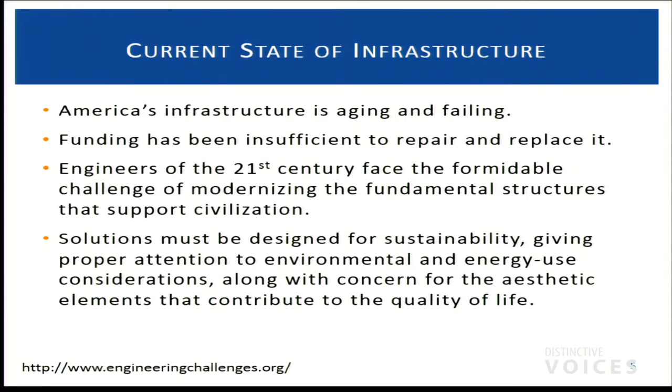The second challenge is that the amount we're investing in repairing and maintaining our infrastructure, as a percentage of total tax funding, has been going down. I think that's because our population is growing—we have a lot of other needs, for schools or hospitals, and so that funding has just been dispersed. So the challenge is for engineers moving forward to come up with better ways to design infrastructure systems, and also how to identify damage and maintain or repair it in a more sustainable manner. That's what I hope to talk to you about a little bit.

Just to give you some information, the American Society of Civil Engineers also has a report card for each state, so you can look at California's report card. They don't have bridges explicitly here—it's tied into the transportation system. So let's start off with bridges.

Bridge is classified as anything that's over 20 feet long, so some of these are really pretty short structures, but there are more than 600,000 highway bridges in the United States. This plot shows the number of bridges as a function of age, and what you see is that about half these bridges are 40 years old or older.

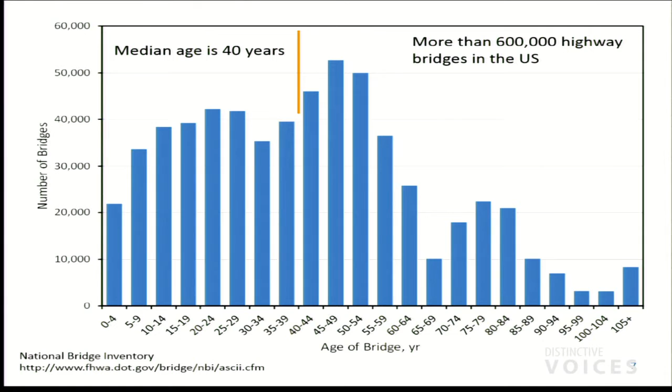Now think about the other types of engineered systems you use all the time. Your automobile, I guarantee, is going to be younger than 40 years. Your cell phone, your computer, they weren't even available 40 years ago. So there's a fundamental disconnect between the types of structures that are part of this urban infrastructure and what we accept as other systems available today. The design principles are very different.

As I mentioned, society has grown. 100 years ago, I don't think anyone would have guessed what Southern California would look like today. That factors into why some of this aging, or some of the deterioration, has occurred.

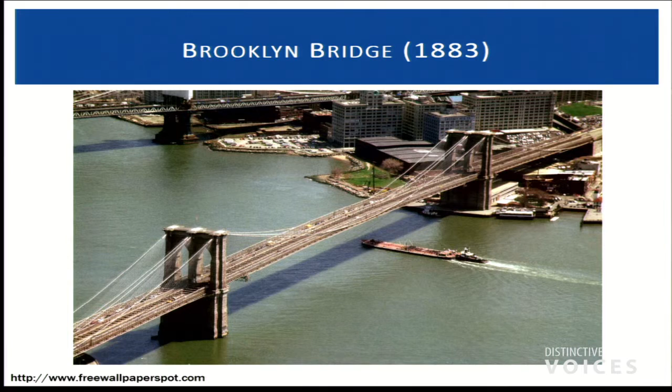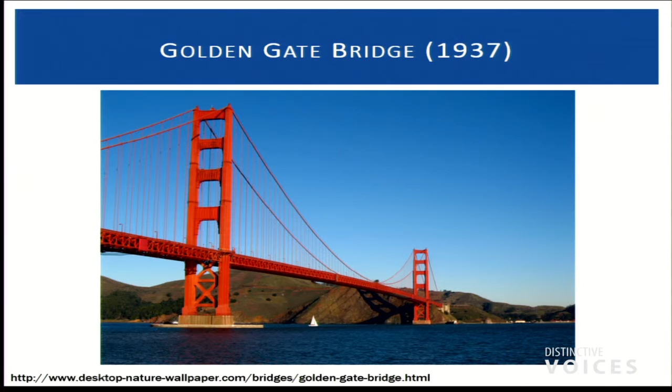As I mentioned, there are some really old bridges that are icons we have great national pride in, like the Brooklyn Bridge on the East Coast and the Golden Gate Bridge here in California. I think all Americans recognize these structures, and maybe I'm going a bit overboard to say there's a sense of pride, but if something were to happen, I think it would be recognized as a loss.

If you look at a map across the entire U.S., these are bridges that aren't unsafe, but they are having deterioration. If there's enough deterioration, they get classified as structurally deficient. You see a lot of these bridges concentrated on the East Coast, because that's where some of our older cities are, but there are also a decent number here in California.

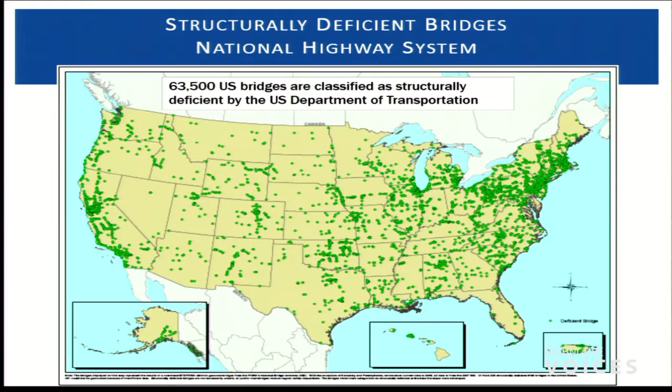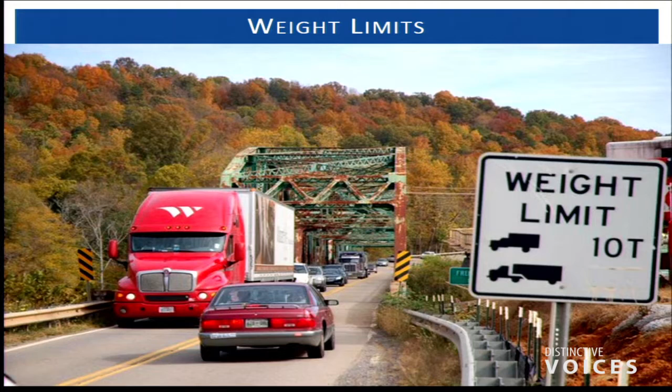In order to ensure the safety of these structures, you've probably seen the load limit signs, which limit the size of vehicles that can cross these bridges. So I don't want you to feel as if there are a whole bunch of unsafe bridges out there. That certainly is not the case.

The bridges are inspected fairly regularly—I'll give you a slide about that in a few minutes. But there is deterioration. If you look at this bridge in the photograph, you can see the rust, right? So rust means we've lost some of the cross-section of the steel sections.

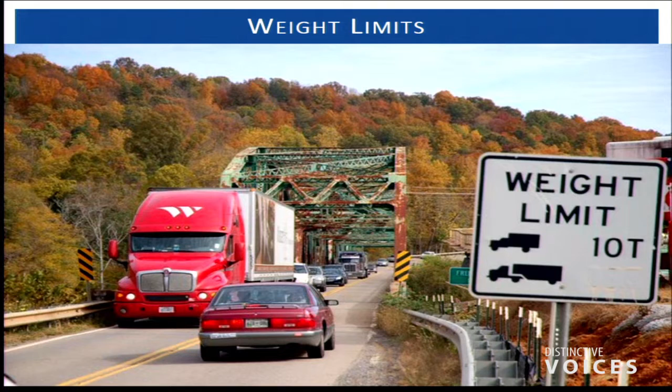You also notice this is a very narrow bridge. You probably don't want to be driving across this when there's a tractor trailer coming right at you. That's because some of these design standards have changed—trucks have gotten considerably larger and heavier in the past 40 to 60 years.

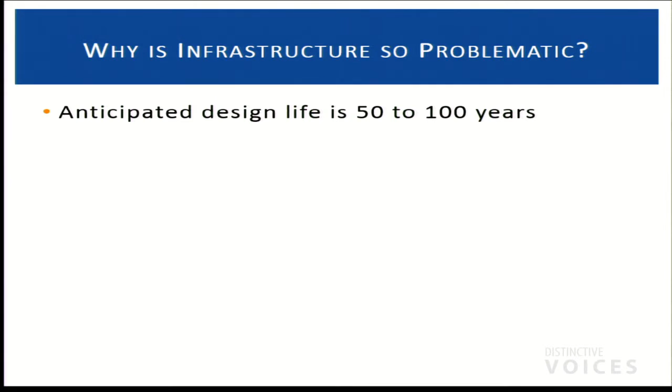I think the last picture really illustrates why infrastructure is problematic. The first thing is we design these systems to last somewhere between 50 and 100 years. But if you start thinking about what Southern California will look like 100 years from now, you realize how difficult that's going to be.

I don't think anyone in this time frame would anticipate how much the population has grown, or how heavy our trucks have become on the highways.

The next thing is that every single structure is unique. If I think of another big structure like an airplane, we have a couple models produced in a factory, but they're all the same design. That's not what happens with these infrastructure systems—everyone has unique conditions, and they're all done one of a kind, in place. So that's very different also.

Another thing that's incredibly important is that we're using public funds for construction, which means all of us are contributing to the construction of these facilities. We don't want the gold-plated bridge, right? We want to make sure we're getting our money's worth, so we have to focus on the initial cost. Unfortunately, what that sometimes tends to do, especially since we don't know what's going to happen in the future, is that the cost of maintenance can be high, and our budgets are tight. So we don't always have the money we need for maintenance and as much repair as we would like.

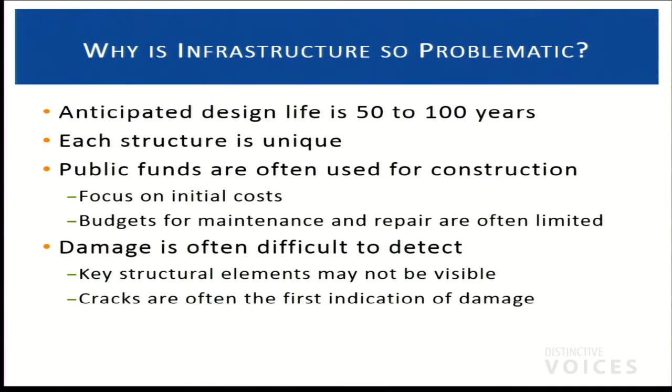And yet think about the Brooklyn Bridge or the Golden Gate Bridge. They're miles, or Golden Gate at least is miles long. So it's very hard to find something as small as a crack that's initiating in a structure that's that large. So that early detection of damage is quite difficult. Even if you identify the damage, it can often take many, many years before a structure can be replaced.

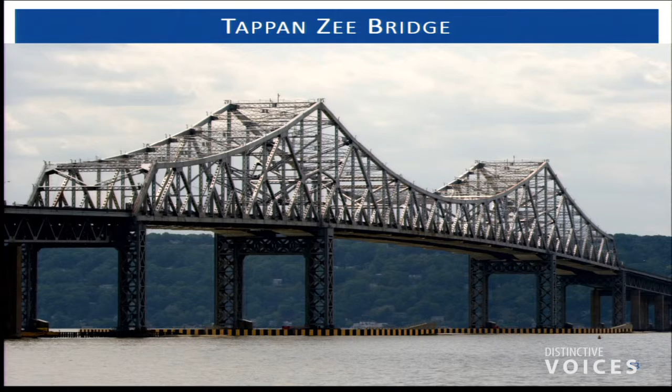So this is the Tappan Zee Bridge. It crosses the Hudson River just north of New York City. Okay, this bridge was opened in 1955. More than 140,000 vehicles cross it every day. And what happens here is there's so much traffic going across the river that they actually have to change the lanes so that there are 5 lanes going with the direction of the commuters and 2 lanes going in the opposite direction. So in the middle of the day, they switch that.

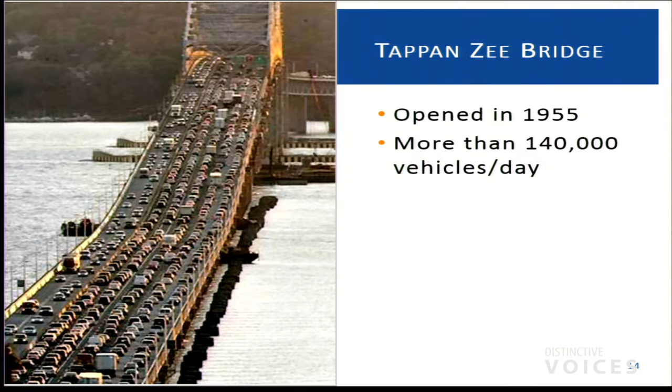So this bridge is at the end of its functional life. It cannot accommodate the traffic need, but it also is at the end of its structural life. Yet when you go through the environmental impact studies, you go through all the structural design, it takes years to be able to replace the bridge, not to mention getting the funding to do it. So none of these things happen really quickly.

Now, I mentioned a little earlier that one of the things that differentiates bridges from some of the other infrastructure systems is that they are inspected on a regular basis. This is because we had 3 major bridge failures between the 1960s to 1980s that really changed the way that bridge inspection was done, or the way bridges were treated.

The first was the bridge in Point Pleasant, West Virginia. And this bridge collapsed, and what happened after that was they implemented a policy that all bridges had to be inspected at least every 2 years. So no matter how large the highway bridge is, anywhere in the country, you know someone is out there at least looking at it.

Now, in 1983, there was a bridge that was classified as fracture critical that failed. Fracture critical means that if one piece fails or one component fails, that can cause a cascading effect and the entire bridge can fail. So we have much stricter quality control efforts in place for the fracture critical bridges. And I'll give you an example of that a little later on.

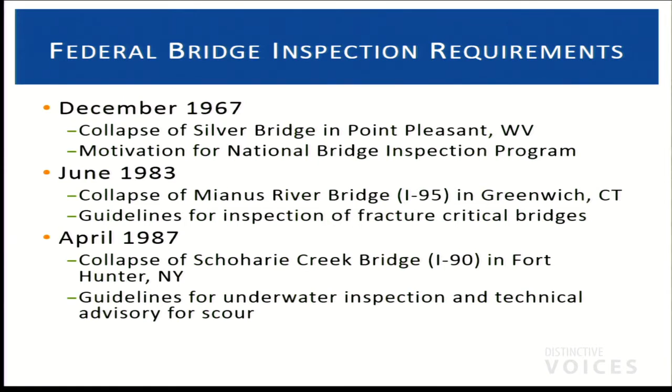The last one is related to scour. So if you remember, it was earlier this summer when the I-10 bridge connecting Arizona to California, one of the supports was washed out. It was kind of like scour. Scour tends to be when you have a lot of water going through under a bridge. It undermines the foundation and the bridge collapses. So for areas prone to flooding, they actually do underwater inspections to make sure that the foundations are still appropriate.

Okay, so I've talked about why infrastructure is difficult. Let's talk about technology. There's all kinds of technology available today. I mean, the smartwatch that half of us are wearing or our smartphones have more sensors than probably they used when they sent the man to the moon, right? And so why can't we use some of this technology to take full advantage of monitoring infrastructure systems and identifying when the problems occur? So that's kind of the challenge I'd like to place out here to you. Why can't we do it? Well, we can do it, right? But there are some limits. There are a lot of buts.

As I think I mentioned before, the damage isn't uniformly distributed on the bridge. It tends to be concentrated in locations, and we don't always know where those locations are. So that makes it hard because when you're wearing a smartwatch, you can get your heart rate. There are some attachments you can do and get other information like your blood pressure, but they know exactly where to place those sensors because it's based on the human anatomy. Because each bridge is unique, those critical locations are not known in advance. If you put the sensor in the wrong place, it really doesn't do you any good at all.

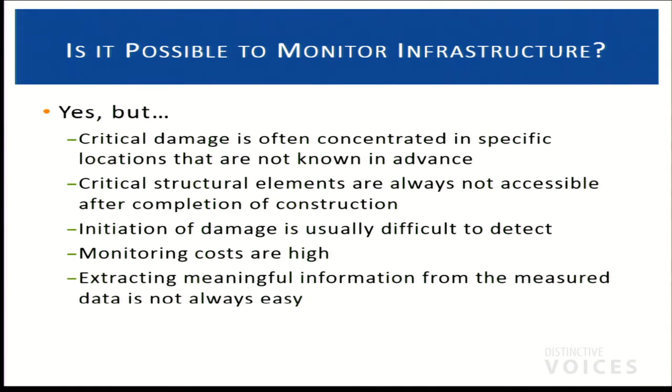And then I think maybe most importantly, because each bridge is unique, and because you might need different types of sensors for each bridge, it can often be very difficult to extract just the right information from the measured data. So you might get totally overwhelmed with data and be unable to tell what the important information is. So let me give you a couple examples.

Let's assume we want to put a monitoring system up. Well, we might be out in the middle of nowhere. There is not any type of power. And just placing the sensors, if there's no power, you've got to rely on batteries. Changing batteries, it could be a major ordeal. This happens to be a truck that's articulated, so you're driving across the bridge, it allows you to inspect underneath. But you can imagine this is a very slow process, and you wouldn't want to be going out and maintaining your monitoring system on a regular basis.

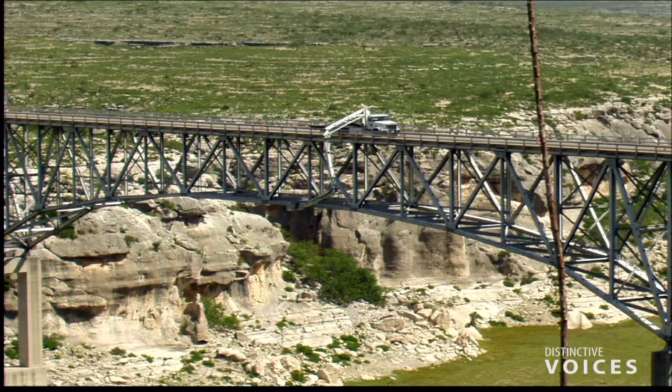This is a bridge that I'll talk about a little later. It's in Texas, just south of San Antonio. It's a fairly major highway bridge. Well, it used to be. It's been replaced now. But when you go out to do the inspection, you're blocking several lanes of traffic. And so you've got 5 miles of traffic blocked up because you're doing that inspection.

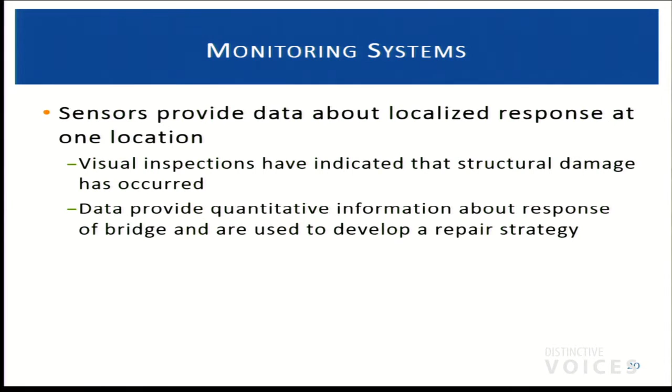So I'm going to give you examples about 2 monitoring systems that I had the opportunity to work on since I've been at the University of Texas. In both cases, we had visual inspections beforehand that the damage had occurred. That allowed us to know where to place the sensors and to decide what type of sensors to use. The information that we collected allowed the owners, TxDOT and their consultants, to develop an appropriate repair strategy for those bridges. So I think in these cases, they're both really success stories.

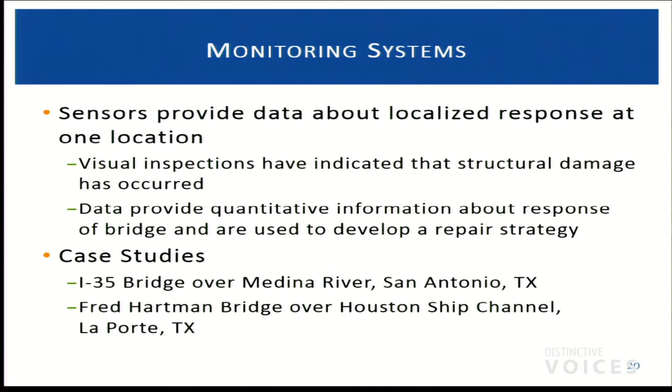So the examples I'm going to talk about are, it's a bridge on I-35. I-35 runs from Texas all the way up to Minnesota. And the example is a bridge that's just south of San Antonio. And then the second is the Fred Hartman Bridge, which is over the Houston Ship Channel. It's one of the major hurricane evacuation routes for the city of Houston.

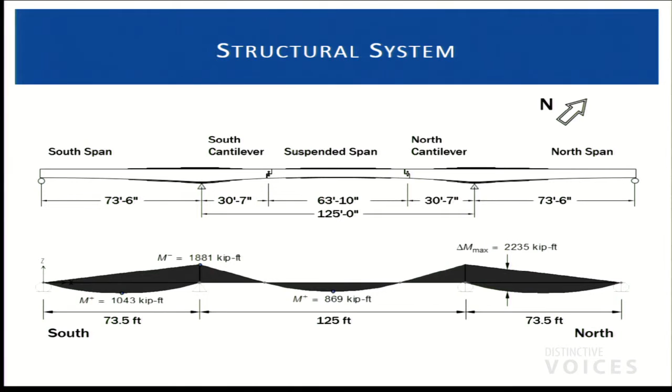Now I apologize, this is my structural engineer coming out. The span here is just under 300 feet, and it had 2 internal supports. What's interesting, though, is it's what's called a statically determinate bridge. So there's no inherent redundancy, and if there's failure at one location, it could cause the entire bridge to come down, to fail.

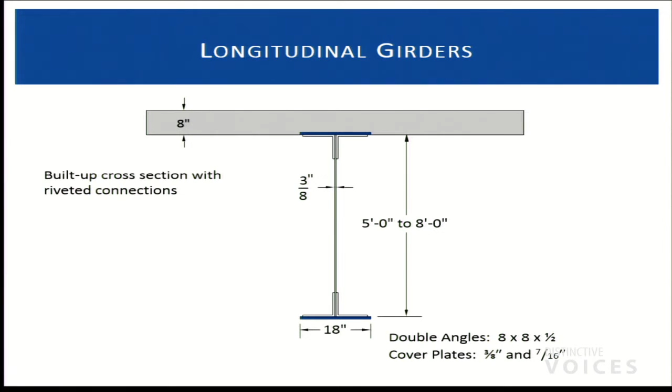The other thing that's interesting is this is a riveted bridge. So in 1935, they didn't have the ability to roll steel sections. So the longitudinal girders have 4 different angles, 2 at the top and 2 at the bottom, and then a very thin plate, and all those are riveted together to form the main structural elements. In addition, there are some cover plates. In the areas where the highest stresses were anticipated, they put some cover plates at both the top and the bottom of the cross-section just to improve its ability to carry these stresses.

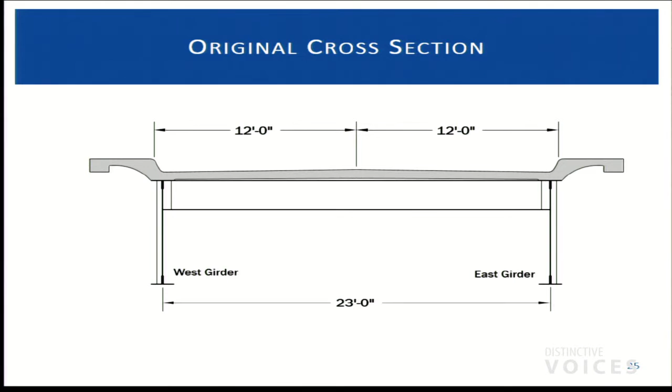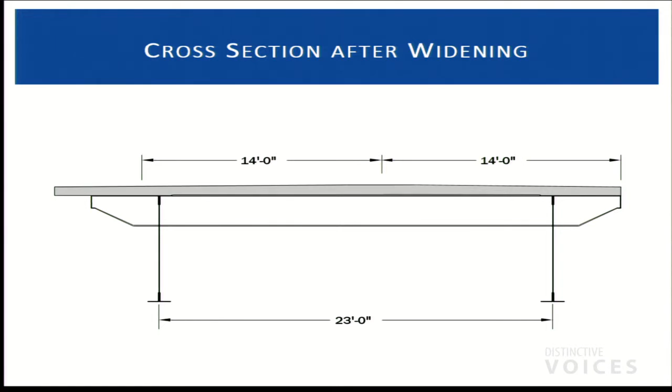Now, when the bridge was originally designed, it had 2 lanes of traffic, and it was 12 feet wide for each lane. This carried traffic in both directions across the bridge. Those are incredibly narrow lanes, especially if you're thinking about an interstate, right? So in 1974, they widened the bridge, and they also turned it into just northbound traffic. So the traffic lanes are at least a little bit wider now. They were 14 feet in each direction. It still wasn't very wide, and there still isn't a shoulder in case you have trouble.

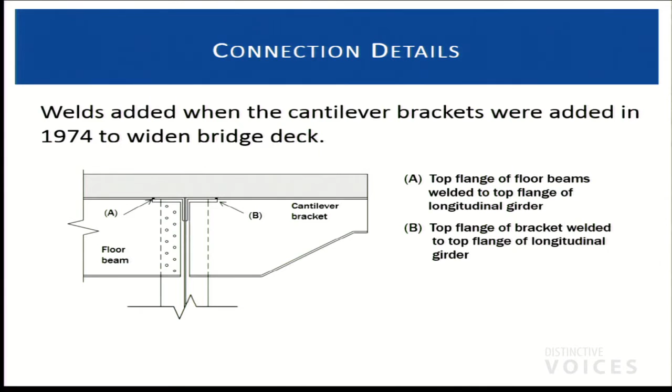But what they did when they installed those overhangs was they put welds on the bridge. And welds were something that weren't available in the 1930s when the bridge was built. Well, these welds, because there are only 2 girders that form the cross-section of this bridge, this bridge is in the category of fracture critical, meaning that if a critical element fails, it's likely the entire bridge will come down. So a very detailed inspection is required.

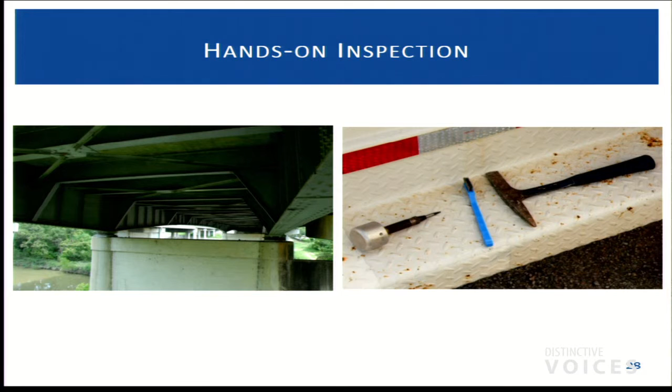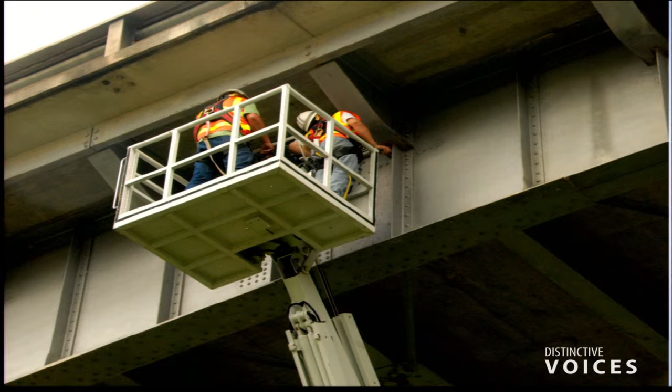It's called a hands-on inspection. You can see here underneath the bridge, about 300 feet long, the TxDOT employees actually go through. These are the tools that they use for this inspection. They've got a screwdriver, a wire brush, and a hammer. And they go and they tap and they scrape off dirt and they just look. And so you've got some kind of bucket trucks, so they're up, hands-on. They are immediately adjacent to that bridge, and they are looking at every single component. So it takes quite a bit of time for this inspection to occur.

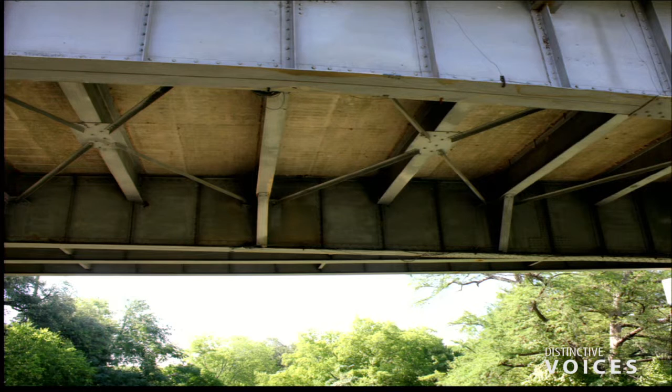What I want to show you is the type of damage that they found. And in order to see that damage, you've got to be about 2 feet away. So to try to give you a little perspective, we're underneath the bridge, and the longitudinal girder is right here. So this is the direction that the traffic would flow on the bridge. There are a whole series of floor beams, which are much shallower, that tie in right below the slab. So I'm going to be showing you that connection.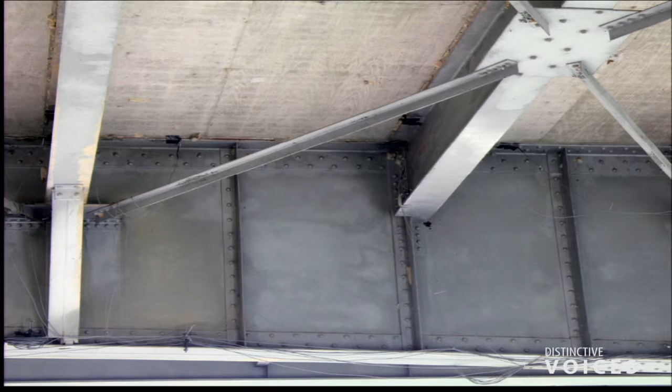Now I'm up about even to the bottom of the bridge. Again, I'm going to zoom in on this connection, and I'm going to go up to the top. And here's the inspector's hard hat, so the inspector is getting right up in there. And then this is what it looks like. You're thinking, okay, this is a little hard to see. I agree with that. That happens to be a crack. So a crack is growing. But the flange there is only about 4 inches wide. So this is why I was telling you it's really hard to find damage, because I've got a 300-foot-long bridge. I've got a crack that is less than 1/20th of an inch, and it's about 3 inches. Yet this is a real cause of concern.

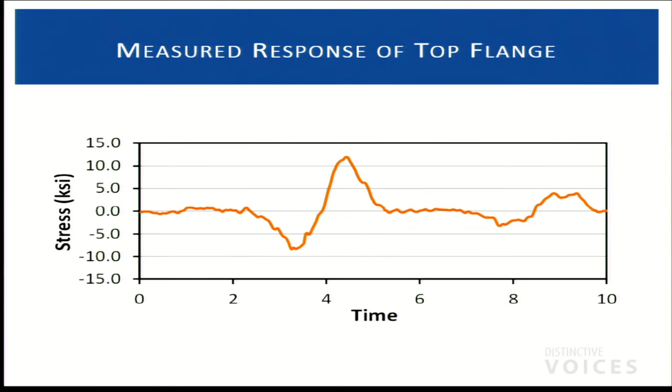The other cause of concern was we put some gauges on this bridge to try to figure out what the stresses were. And this happens to be a stress history. So as a truck crossed over the location where our instrumentation was, it generated a big pulse. This pulse was 20,000 pounds per square inch. Now, I know that unit doesn't mean a lot to you, but it's a very large stress.

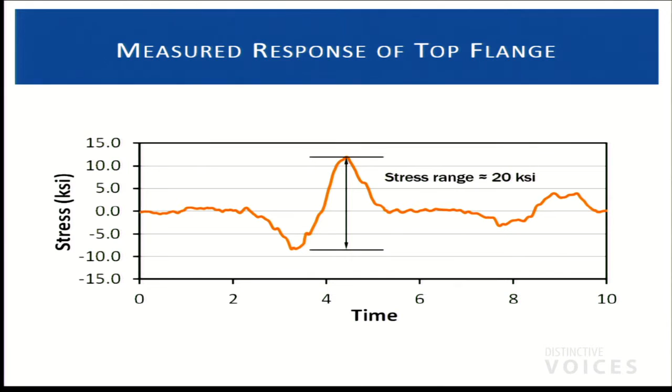The damage that's induced by these repetitive loads is called fatigue damage, and it's proportional to the cube of the stress range. So if I have a stress range of 1 KSI compared with 10 KSI, the 10 KSI stress range will be 1,000 times more damaging, because the fatigue damage goes up by the cube. So this was a tremendously large stress range. Now, we didn't record many of them, but just the fact that we got one this large was really disconcerting to us.

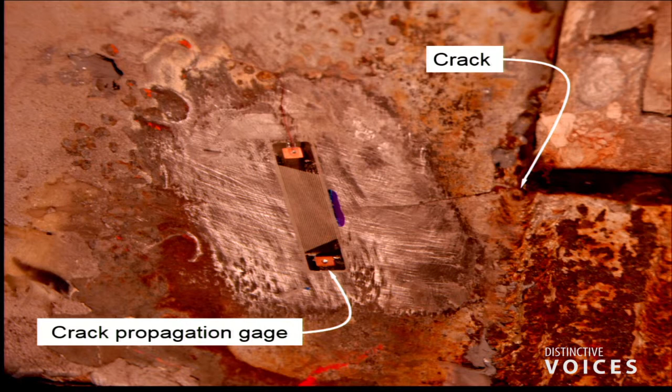The other thing that we did is we knew where some of these cracks were located, so we put what's called a crack propagation gauge right at the tip of the crack. It's a whole bunch of little wires, and as the wires break, the resistance of this gauge changes. So you get a feel for how fast that crack is growing. And we were having trouble with our solar panels, so we don't have continuous data here.

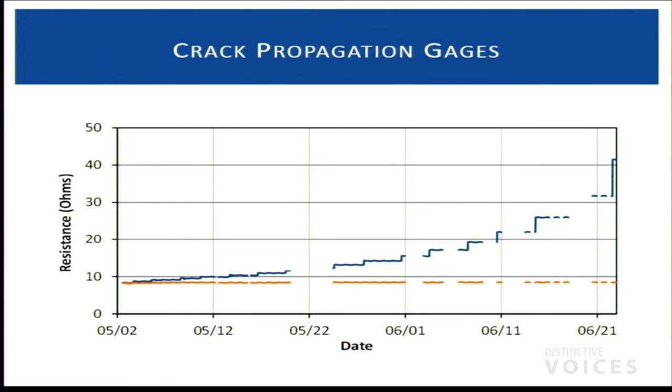But what you see is this blue line started off here with a resistance indicating that the gauge was intact. And within about 6 or 8 weeks, it had jumped, indicating that the crack had grown about 0.4 of an inch. Now, we only put 2 up. You can see the other one is pretty stable. So we had a situation where we had very, very large stresses that we measured. We also knew that these cracks were growing quickly. We went to the Texas Department of Transportation, told them about what was happening, and they had actually been concerned about the bridge.

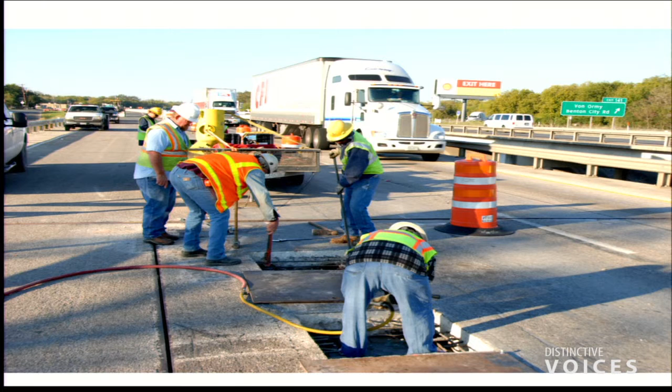They didn't have the quantitative data that we had from monitoring, but they had been tracking these cracks because they had been going out every year to see how fast things were going. What they decided to do was essentially cut out a section of slab every place where the floor beams intersected the girders, and they reinforced those with a series of plates.

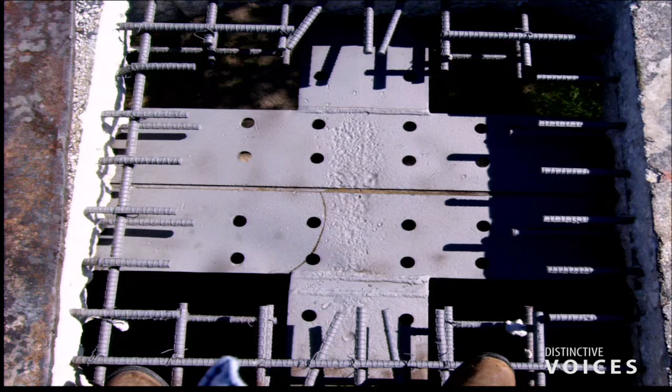So here you can see the workers have dug out the holes. Now, these circular holes here, unfortunately, we didn't get to take the picture before they drilled the holes. That's for the repair scheme. But what I want to show you is this yellow line is one of those cracks that was growing so quickly. And you can see here it's propagated across the entire flange of that channel.

As it turned out, there was another bridge that was exactly like this in another part of the state that had never been widened. It's still in use. It doesn't have any cracks at all. But because this was on an interstate, had so much traffic, and those lanes were just too narrow, they went in and they put those welds in, and that's what caused the problem.

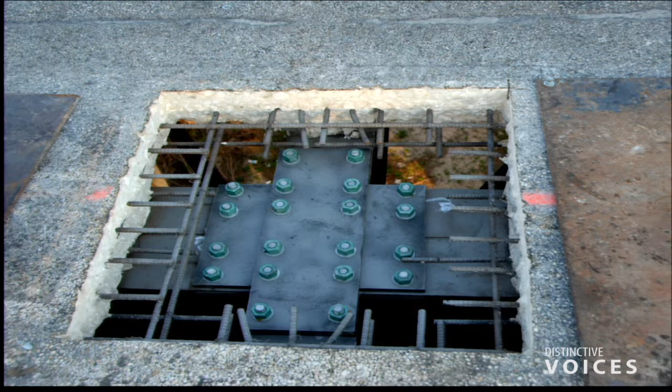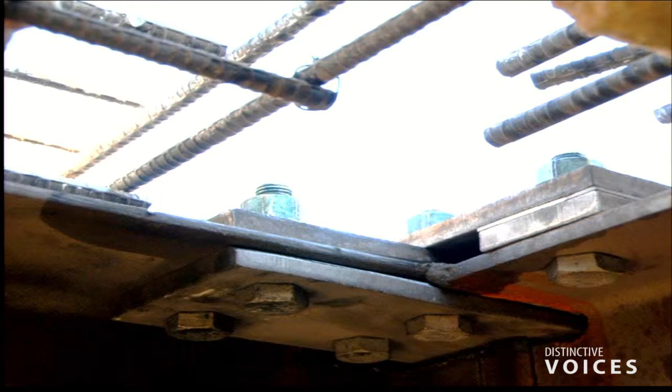So for this repair, they just did a really quick and dirty strategy. They put a series of plates on top so that there was an additional pathway so that the stresses could be transferred through these plates, which they had bolted on. And this is looking from underneath just so you get a feel for it.

Now, we were lucky. We had been out monitoring this bridge for over a year, and we happened to catch that entire construction sequence. So this blue line shows you how large the stresses were before they did the repair, and the orange line showed what happened after the repair. And you can see that it shifted considerably to a smaller stress range. So in this case, that repair strategy was extremely effective.

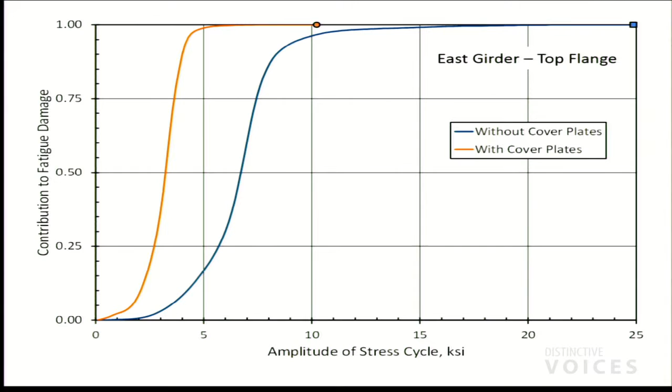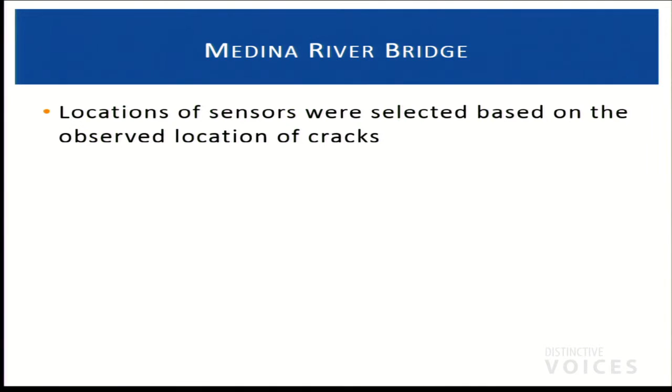Now, let's go back and review a few things here. We knew where to put our sensors because we knew there were cracks. So that greatly simplified the fact that we were looking for that needle in the haystack. Secondly, they developed a repair strategy that just provided an alternate load pathway for the top flange. Our monitoring system demonstrated that strategy worked very well.

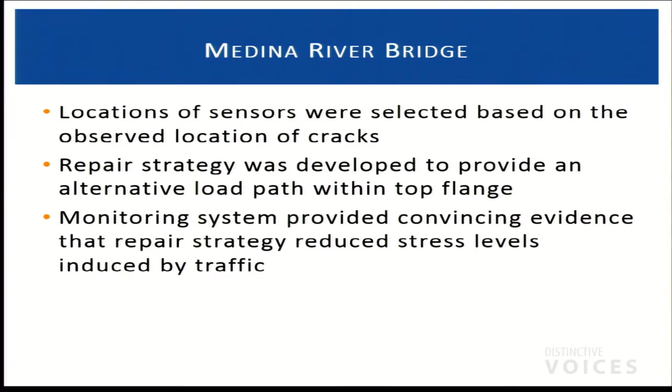What this allowed them to do is instead of having to replace that bridge immediately because those cracks were growing, they realized they had about an 18-month to 2-year window to do it because they had invested in their repair strategy. So as of today, this bridge has been removed from the inventory. There is a new bridge there. But it was safe while they kept it in service on the interstate.

Now, another option would have been to load post it and limit the traffic load. But that would have been incredibly disruptive because, as I mentioned, this is one of the major corridors between Mexico and Texas. And so there are just a huge variety of trucks that are crossing it. So I think this was an example where our instrumentation really helped us to quantify the extent of the damage and gave them confidence that the repair strategy had worked well.

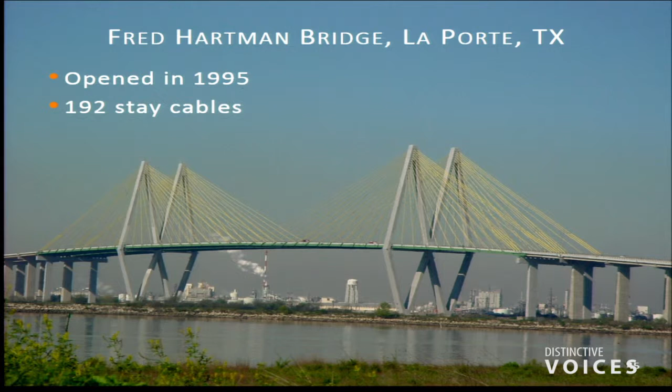That was a bridge that was at the end of its life. I want to talk now about the Fred Hartman Bridge outside of Houston, which was at the very beginning of its life. So the bridge opened in 1995. It is basically 2 parallel bridges, and it's called a cable stay bridge. And so each of these cables is anchored at the top, and it's also anchored at the deck. So unlike a suspension bridge, they're not continuous. They're just individual segments. Now, the following video was recorded in April of 1996.

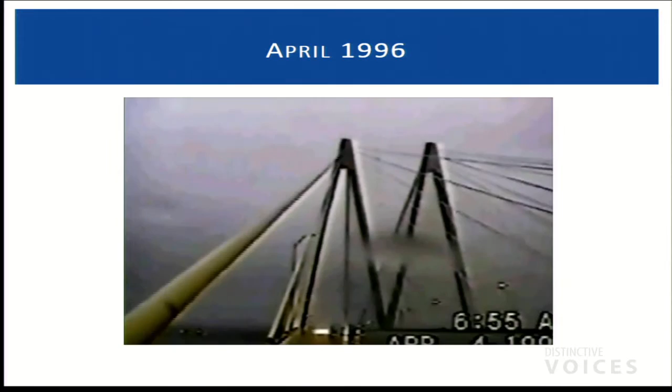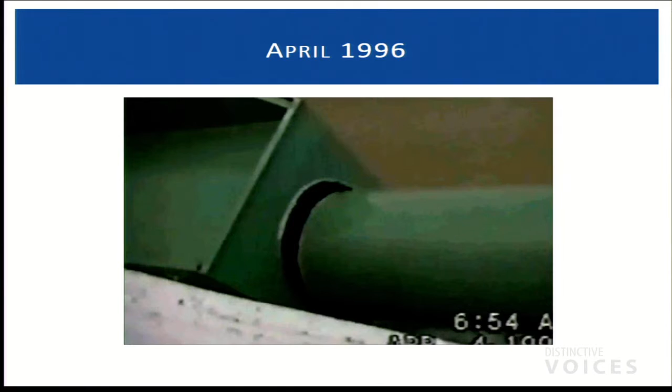So this is a brand new bridge, right? This is one of the major hurricane evacuation routes from the 4th largest city in the U.S. And it's not even a year old. This is not a good sign. I mentioned there are 192 stay cables on this. It was over 180 where there were weld fractures of some sort. Now, luckily, this weld right here is really not part of the structural system. So those were easy to repair.

The stay cables themselves were the primary load-carrying mechanisms. The stay cables were steel strands, pre-stressing strands, arranged in a pattern. These cables were between 200 and 650 feet in length, with somewhere between 19 and 60 strands in the entire stay cable.

The trouble is you couldn't just open up the stay cable and look to see if there was any damage. That's because in order to provide corrosion protection, they have a polyethylene duct around the steel members, and then they fill it with a cementitious grout. So the only way you can see what's happening is basically to dig into it and destroy the strand. Obviously that's something you don't want to do if your bridge is brand new.

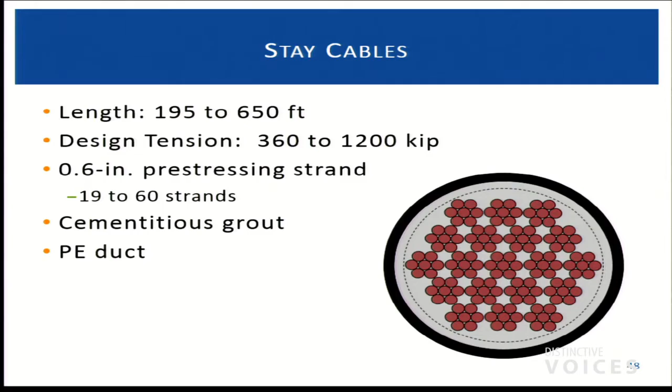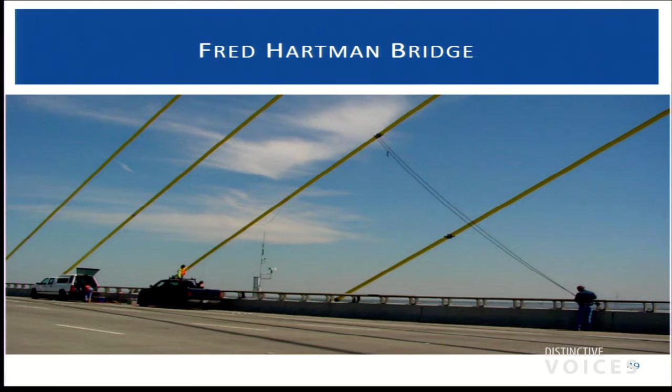I was actually lucky to be part of the team that went in to try to evaluate what was happening with the bridge. Because each of these cables were anchored at two points, we could do some very simple tests to try to figure out what was happening in the bridges.

So all of you have seen the violin, right? You've seen the concertmaster get up and play the A string. That gives a 440 frequency, and that's how the entire orchestra tunes. Well, you can think of these stay cables as essentially being a really big violin string. And the violin string, this is the frequency.

We'd talk about the first mode of vibration, which depends on the length. The length of the violin string is fixed. The mass is fixed because you've got a different mass for each of the four strings. And when they turn the knobs, they're changing the tension — that's what they do to tune it.

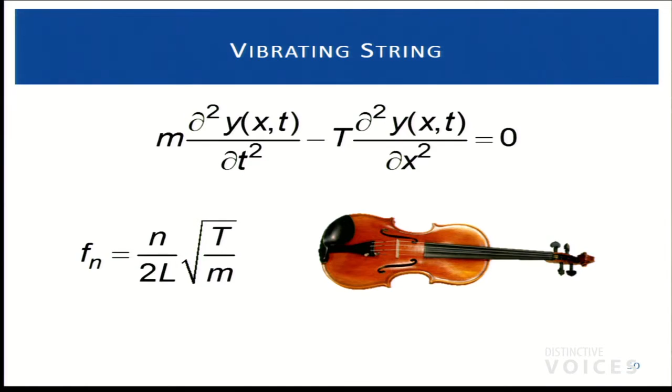Now, for a cable, and I apologize for the differential equation — I'm not going to go into it — it's a little more complicated, but it's still the same basic idea. It's still a really long string.

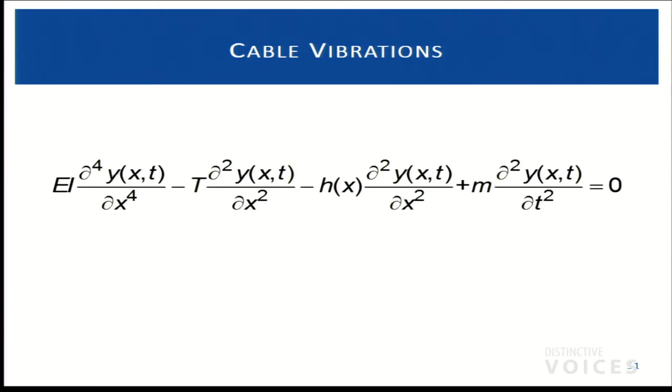So we went out and we started pulling on these strings. What we tried to do is compare what we measured with what we expected it to be based on the design tension. These are all the dots — the 192 dots are shown here. What you see is they're all over the place.

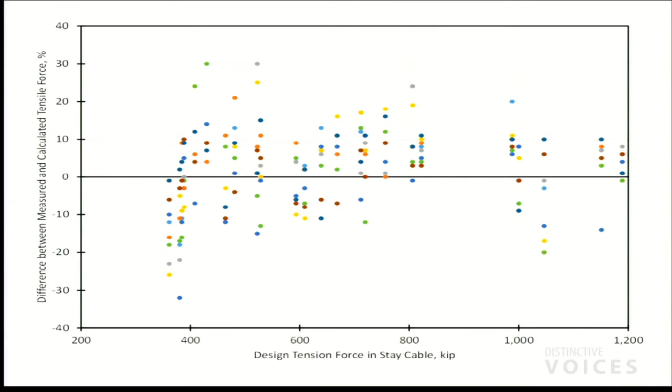Some are high by 30%, the difference between what you would calculate the force to be and what you would get from the vibration. Some are low by 30%. They're just all over the place. The decision that was made was: we're going to expect some scatter here. Let's repair it, let's make sure that we don't have those big vibrations, and then we'll do something to try to make sure that we can monitor these strands to see if more damage occurs.

This was one of the first cable stay bridges built in the U.S. Around the same time, they were noticing the same type of cable vibration in many of these bridges around the world. It turned out that the damping is actually quite low. So when the wind starts blowing and you get a little bit of light rain, these bridges tend to vibrate, and that's what we saw in the video.

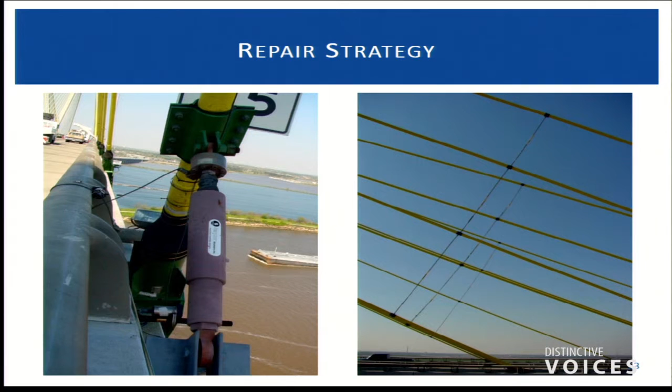So what they decided to do was add a damper, an external damper, at the bottom of every single cable. As the cable started to move, this helped to damp out those vibrations. The other thing they did was, higher up in the cables, they tied the cables together. Because each cable is a different length, it has different vibrational properties, so by tying them together, you get a stiffer system. They have not seen any more of those large amplitude vibrations on the bridge.

So the repair strategy worked. Now the problem, though, is they didn't know how much damage had occurred to the key elements, those pre-stressing strands, before they did the repair strategy. And there really is no way to determine how much damage had occurred because we couldn't do the visual inspection.

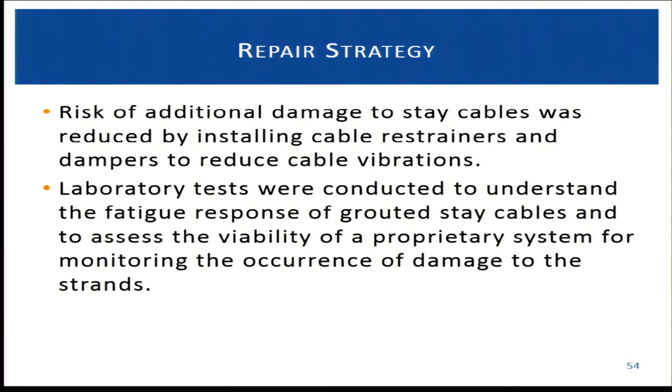So a company came forward with a proprietary system where they would basically put three different instruments on every single stay cable, and they would listen for the pop that's made when you get a wire break. The Texas Department of Transportation thought, okay, that sounds good, but we want to verify that in the laboratory beforehand. And that's where the main part of this project that I worked on came in.

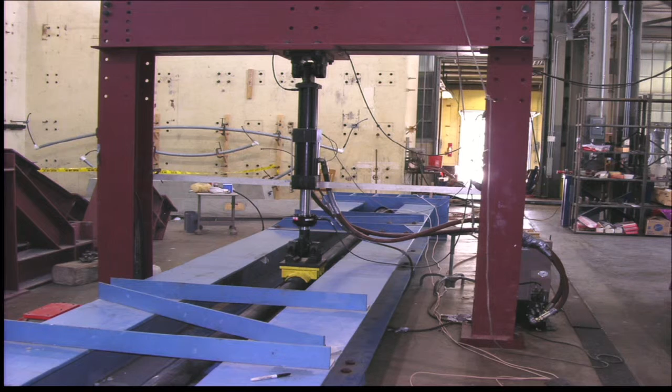We had a much shorter version of the stay cable, but we built it the same way. Our cables were about 34 feet long.

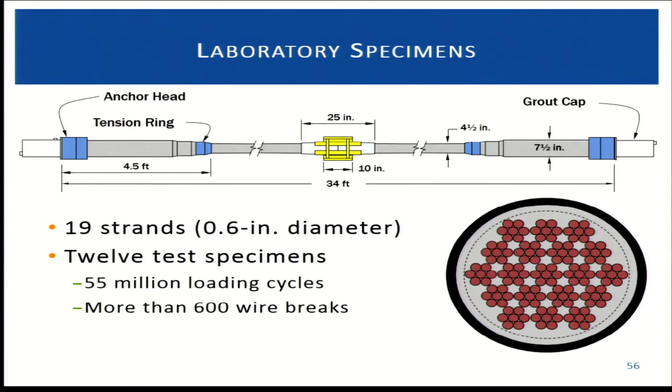And we used the same cross-sectional properties. And we had a big actuator that was in the middle that just moved the cable up and down, and we generated fatigue damage. And so this allowed us to understand how does damage accumulate in these big systems, and where is it located? What are the key issues? We also had this proprietary system on all of our stays, or all of our test specimens, so we could have a better understanding. We could really go in and check afterwards, did these systems work?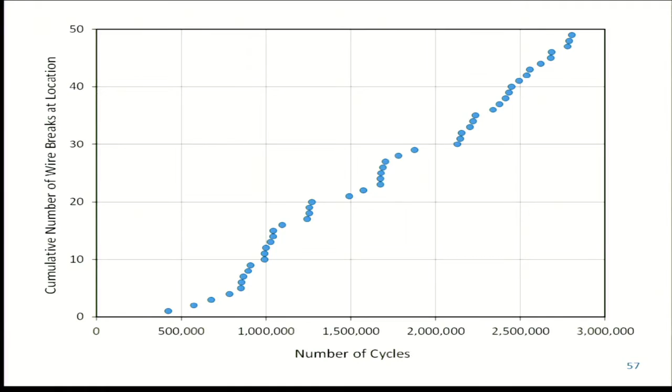Okay, so the first thing we noticed was that as you start getting damage, only a couple happen at first, and then it's like popcorn. I think the popcorn analogy in the microwave is a great example. You put the bag in, nothing happens, you get pop, pop, and then everything starts popping. That's very similar to how the damage in these wires occurs.

What happens here is that the wires start rubbing against each other as the cables are vibrating, and you get a product that's much harder than the steel. And so it causes a friction, it heats up, and then you get a break in the wire. And so at first it's a very gradual process, but then it accelerates.

Okay? So we couldn't give the Department of Transportation an exact number of wire breaks that they could accommodate. But what we could tell them at least was, if you monitor this all the time, if you start hearing a bunch of pops, you're in trouble. But if you don't hear any, then you're probably in good shape. And so that's what we did.

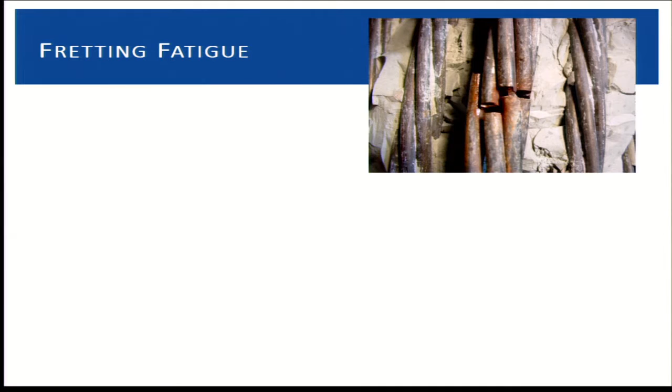So we had the advantage that after the test, we could tear our specimens apart and we could look at the damage. So we're looking here at a 0.6 of an inch diameter pre-stressing strand. There are 7 individual wires here, and you can see right here at least 3, I think there's 4 right here. 4 wires have broken in this strand. If you look at the end of it, you can see the individual wires.

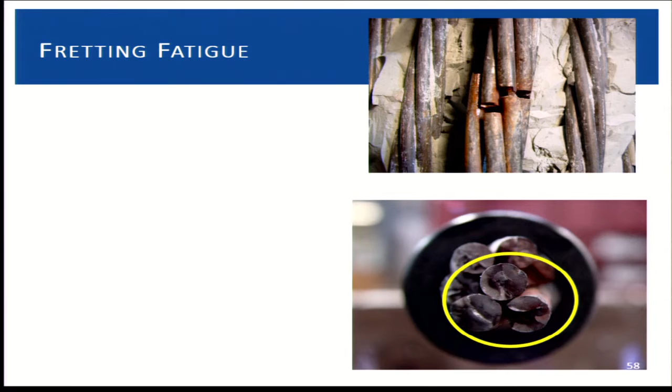And if we zoom in a little more, what we can see is we had a location where the crack propagated. The crack grew very slowly, and then the tension in that wire exceeded the capacity, and it fractured. And that's the pop, and that's what the acoustic monitoring system would pick up. And so in this case, you can see 3 of these points.

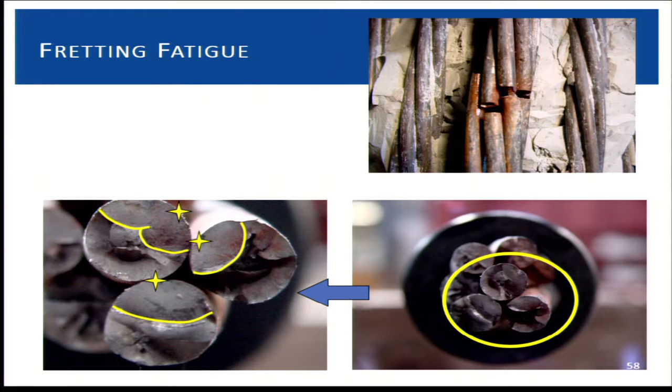Okay, we also found that they tended to be located at the ends, but that didn't really matter. It doesn't matter where it's broken along the entire stay. If they're broken, you're in trouble.

So this is what the data would look like. This type of sensor is very much like what they use for earthquake monitoring. It listens all the time. It has a memory, and then if it hears a pop, it records from a little before that pop occurred. Same thing they do for the earthquake monitoring. And so by having 3 or 4 different sensors on each strand, you can identify the location.

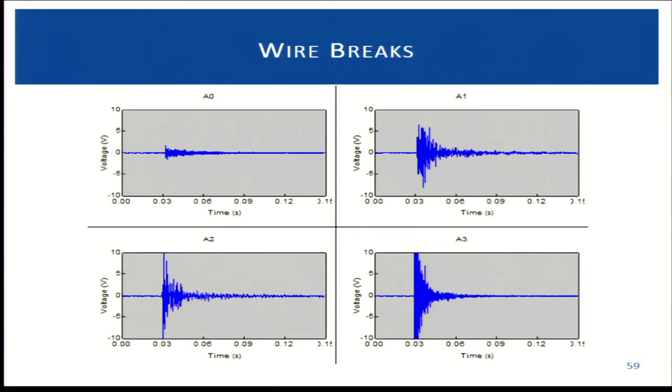So for the Fred Hartman Bridge, I think this really was a success story, whereas we started off with a bridge that was brand new, it was a critical structure, and it was having serious problems. TxDOT did a repair strategy that worked. The acoustic monitoring system, we demonstrated in the laboratory that it was doing a really good job of catching the damage.

And although we can't tell them exactly how much damage occurred during those initial incidents that I showed you in the video, because they're monitoring continuously, they know when wire breaks occur moving forward. And so they've had a few. They've been distributed among different stay cables, so they're not really worried about it.

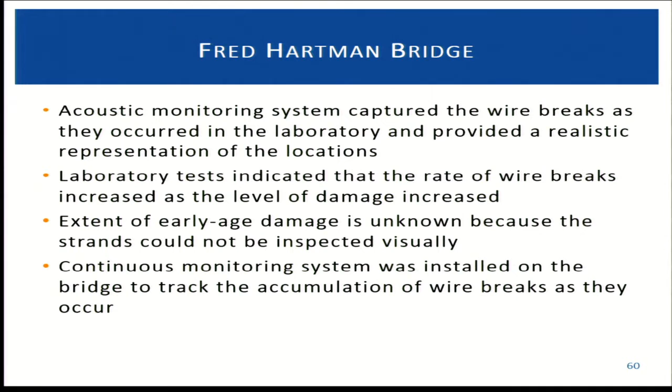I think I told you, this monitoring system, though, cost over $1 million to install, and they pay an annual fee for this type of monitoring. So the importance of the structure and the high risk of damage is why they're willing to provide that much money for this type of monitoring.

This is another bridge that's located in Louisiana. It also had some cable problems. I think it was more related to corrosion. Less than 20 years after the bridge was built, they actually replaced every single cable on that bridge.

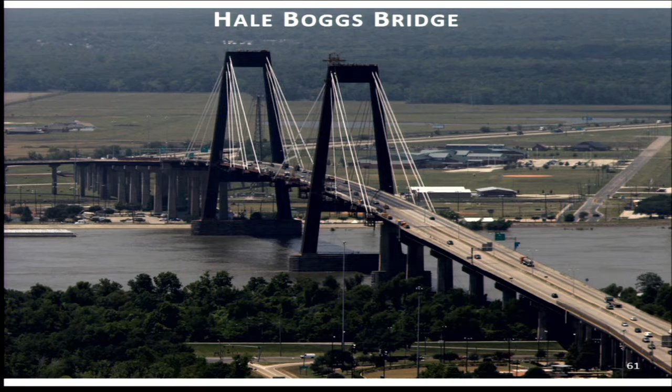So that's your other choice - you can go in and just replace all of them, but that's extremely costly and it takes a lot of time in construction. For the Fred Hartman Bridge, it would have been very difficult to do because when they built the bridge, they used a really large jack at the top of the structure. But when they closed off the piers, that same jack could not get in, so they'd have to stress each individual strand one at a time. Some of these cables have like 60 strands in them, so it would have been a very, very time-consuming and difficult construction project.

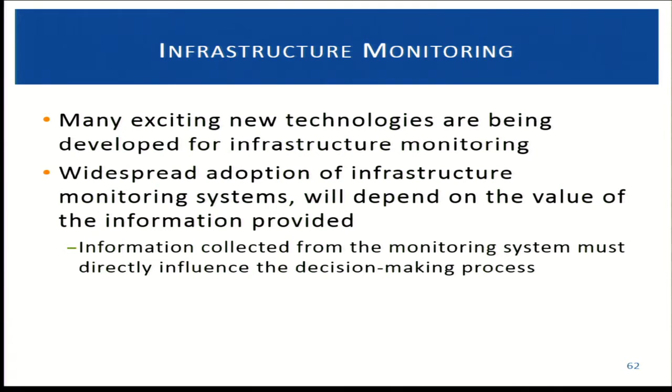So I started off by telling you that we've got a problem with infrastructure in the U.S. And what can we do, right? I'm hopeful that our new designs are going to be better than some of our older designs, but we have a large component of old infrastructure in the U.S., and we have to find ways to maintain and repair that. There are a lot of very exciting new technologies being developed for infrastructure monitoring. I'm not optimistic that it will be widespread adoption, though, because these costs are going to be high, and it's often not easy to get the information you want from the monitoring systems.

In order for it to work effectively, the information that you collect has to directly influence the decision makers. I know that when we've talked with TxDOT about doing research projects where we develop monitoring systems or sensors for them, they think it might be great, it might work in the laboratory, but you put it out in a difficult, extreme environment, and it's very difficult for them to maintain those monitoring systems. That's why they prefer to have a company that they pay to monitor rather than invest in trying to do that themselves. I think the costs of this are going to be quite high - that's what will limit the widespread adoption of monitoring systems.

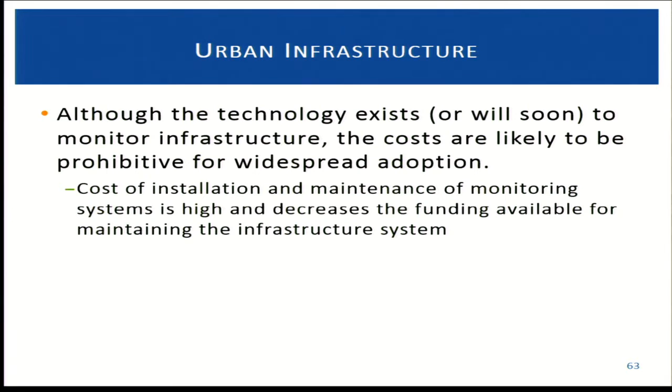I think there are a lot of cases where a specific problem is identified - they'll call in a consulting engineer, go out and install monitoring, really help identify the problem, and that focuses into the repair strategy. So I think that's being used quite often now, and that's probably the much more common way you're going to see infrastructure monitoring.

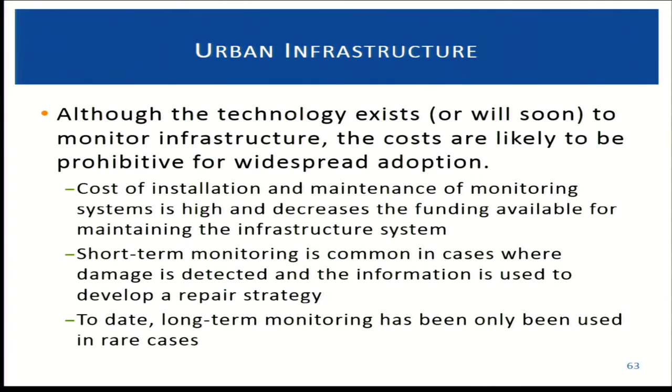Now, I'd like to close. As I mentioned, this long-term monitoring is used in very few cases in the U.S., and they have to be a critical structure.